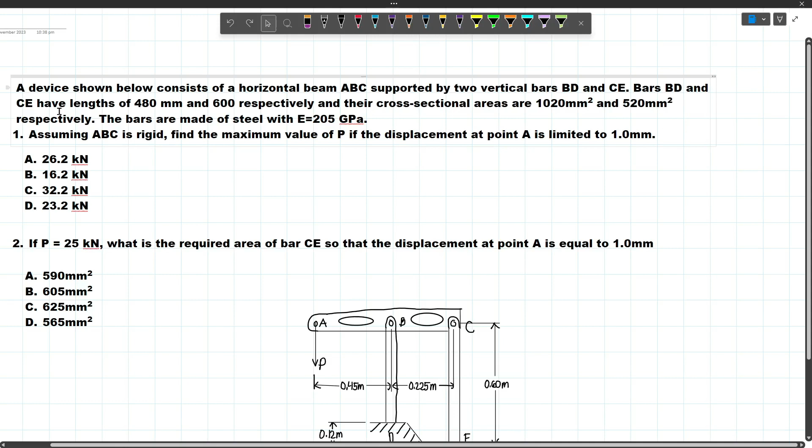A device shown below consists of a horizontal beam ABC supported by two vertical bars BD and CE. Bars BD and CE have lengths of 480 mm and 600 mm respectively, and their cross-sectional areas are 1020 and 520.

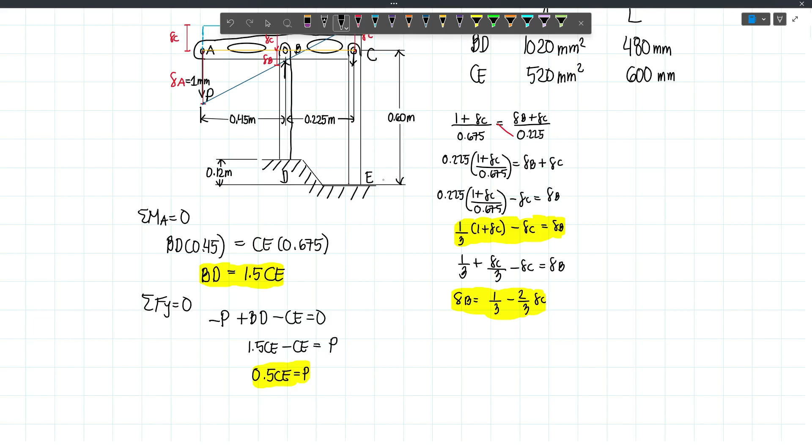Let's try to look at our question: assuming, find the maximum value of P if the displacement at point A is limited to 1 mm.

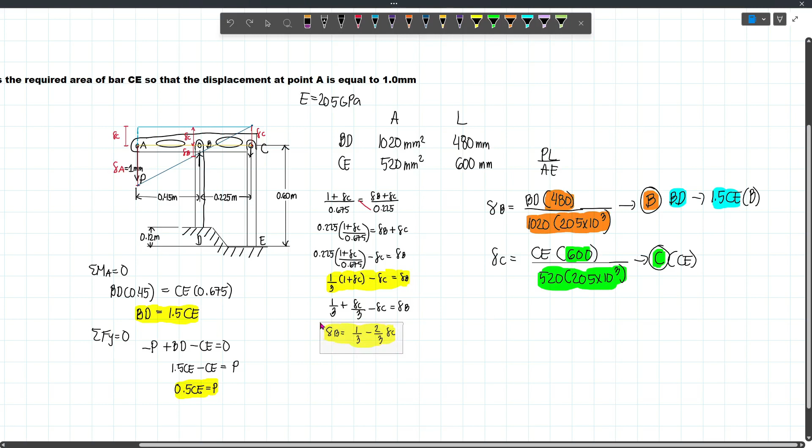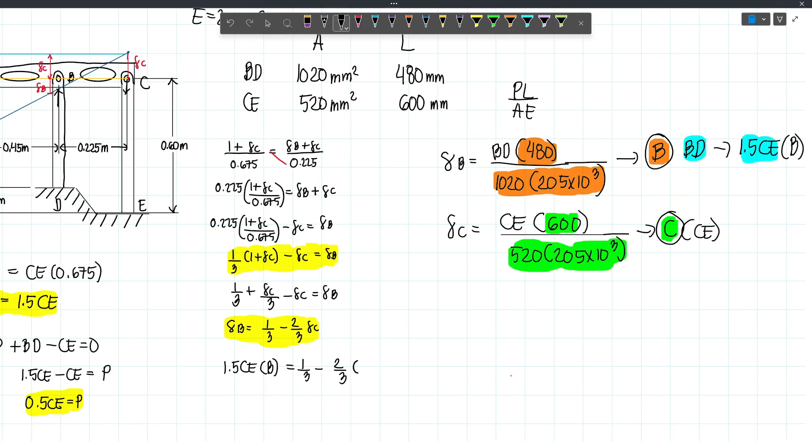And then equals 1/3 minus 2/3. The deflection at C is C times CE. So times C times CE. Now we can solve for CE since we can plug in known values. So CE times 1.5 times B. This has an advantage since we already stored that value, so we don't need to input the long expression again. And then equals 1/3 minus 2/3 times C times X.

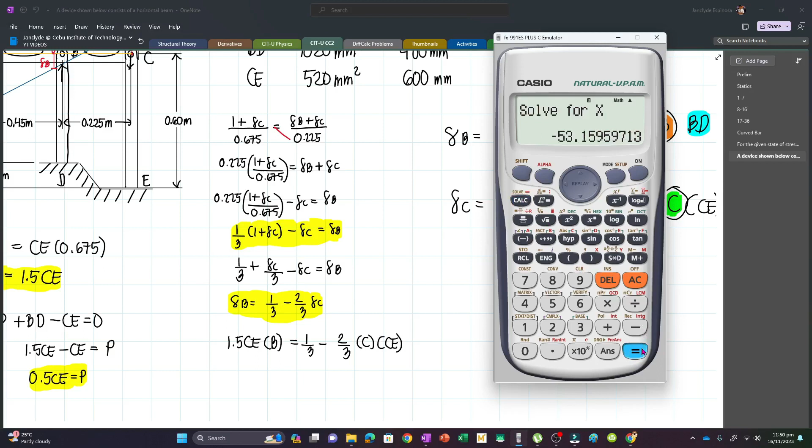Press shift solve. We can get the value of CE, which is 46324.13 Newtons. But the question is asking for the maximum value of P.

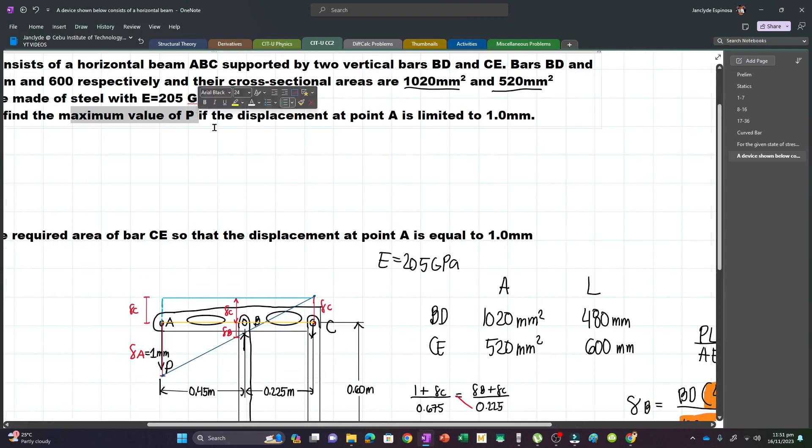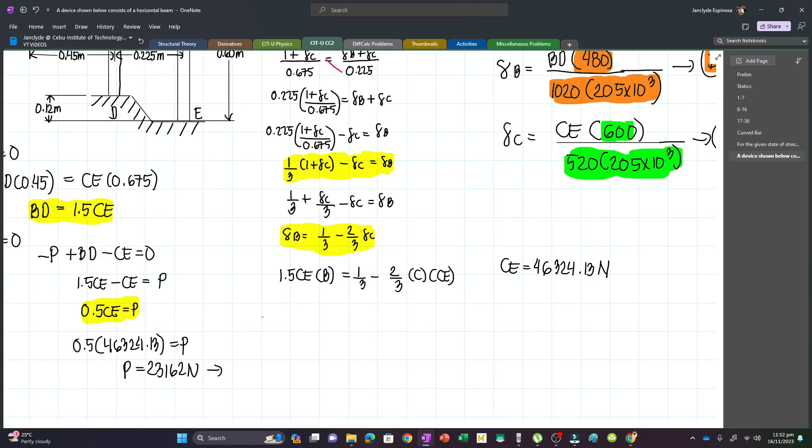So let's solve for P now. P in terms of CE is 0.5 CE. So we substitute 0.5, or basically 1/2, of this value. Let's just type it: 46324.13, that's equal to P. So our P is 23162 Newtons. And if we convert that into kN, divide by 1000, we get 23.16 kN.

So that's our answer, which is 23.2. I hope you agree.

Next, if P is equal to 25 kN, what is the required area of bar CE so that the displacement at point A is equal to 1 mm? We'll still use the same equations for this.

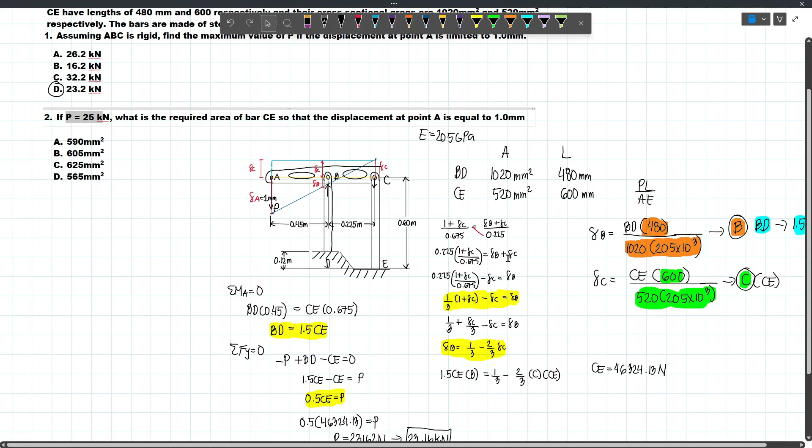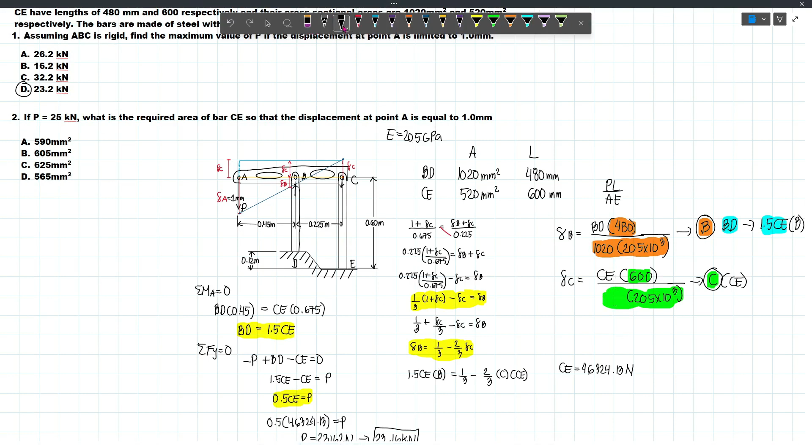However, what will change is the area of bar CE. This will now be unknown, so it goes away from the equation. Let's use ACE as our label for that. And then let's use these relations.

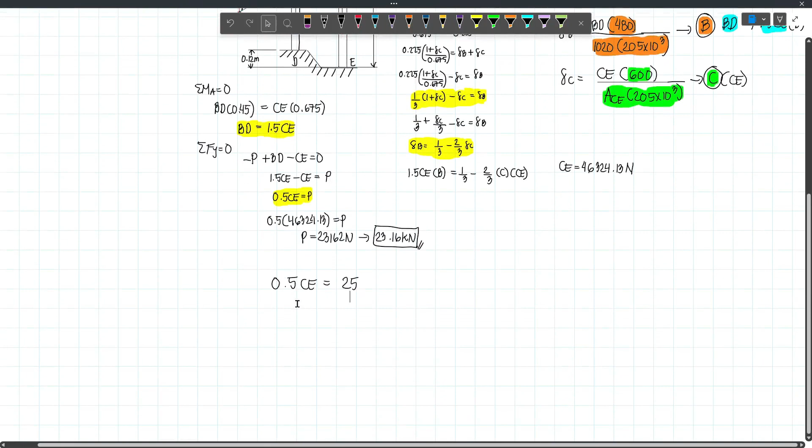Now if P equals 25 kN, let's use that. We know the relationship between CE and P: 0.5 CE equals 25 kN. Let's set that aside since when we substitute into the elongation equation, the units need to be consistent. So CE is simply 25 over 0.5, or times 2, which gives 50,000 Newtons.

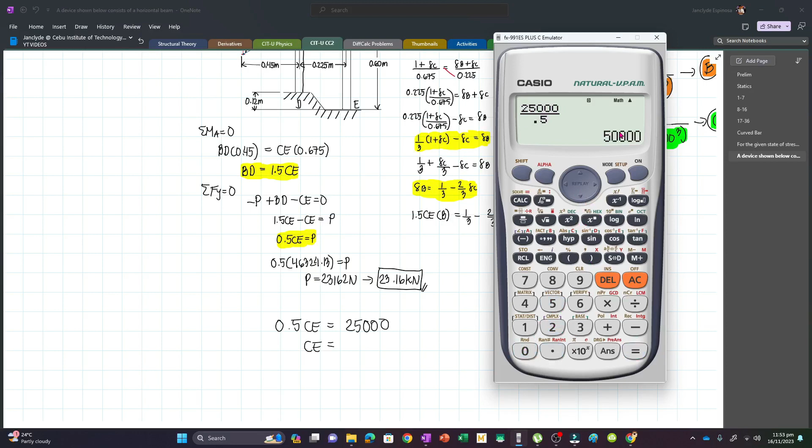And then we know that BD is equal to 1.5 CE. Let's use that relation: BD is equal to 1.5 times 50,000.

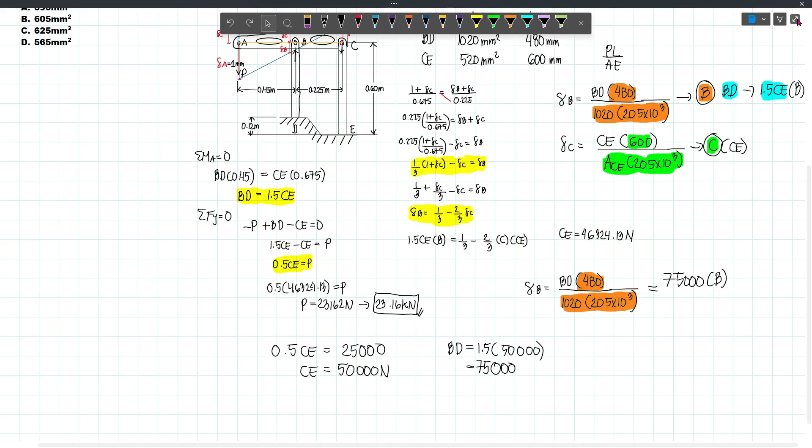That gives 120 over 697. Let's just get the decimal value, which is 0.172. So the elongation at B is equal to 0.172.

Now what we can do here, since we need the elongation of CE again: 50,000 times 600 over ACE times 205 times 10 to the 3. This constant value, let's store it in D. So the elongation at C reduces into this form.

Let's just say we store it in D, that's the green value. That becomes D over ACE. I hope you agree. Again, the green value is already stored. So D over ACE, let's input that value D into the calculator.

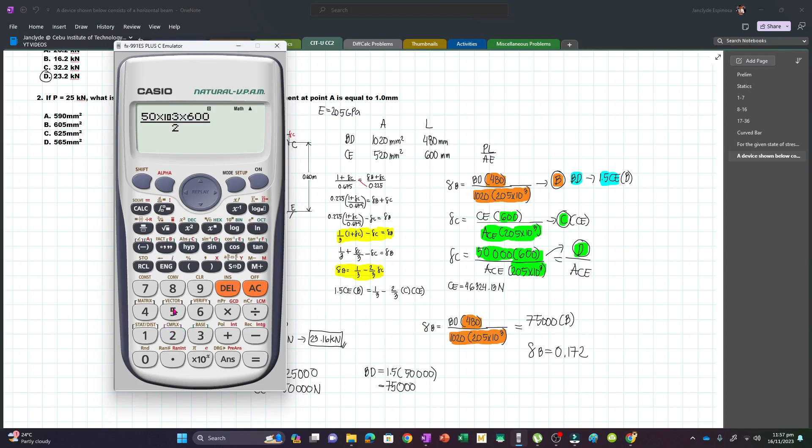So that's equal to 50,000 times 600 over 205 times 10 to the 3. And so we store that in D. That's it, and we'll plug all of this into our equation.

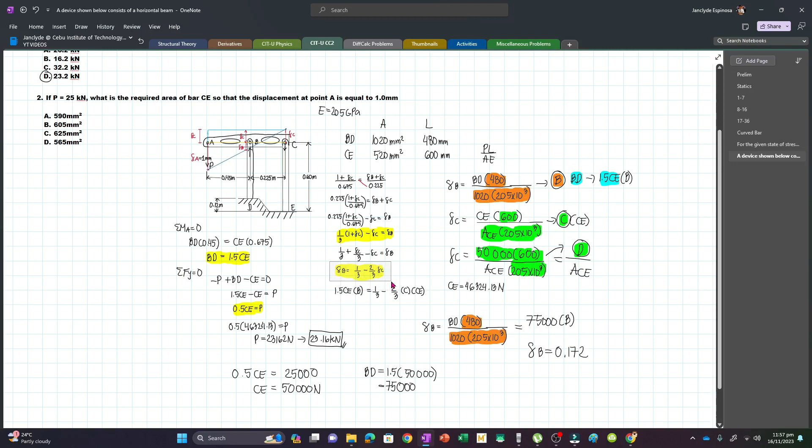Again, this comes from our deflection at B equation. Let's just copy that. Remember the deflection at B is 0.172. So 0.172 is equal to 1/3 minus 2/3 times the elongation at C.

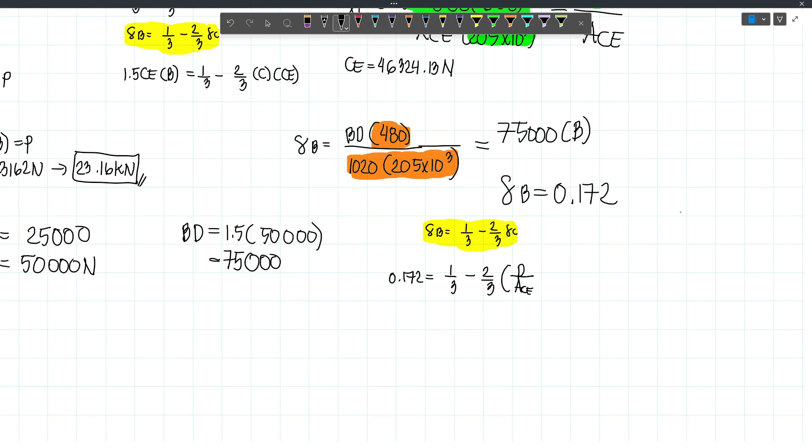Now the elongation at C is D over ACE. So that becomes D over ACE. D is already stored in the calculator, and our unknown is ACE. So let's type 0.172 equals 1/3 minus 2/3 times D over the unknown ACE.

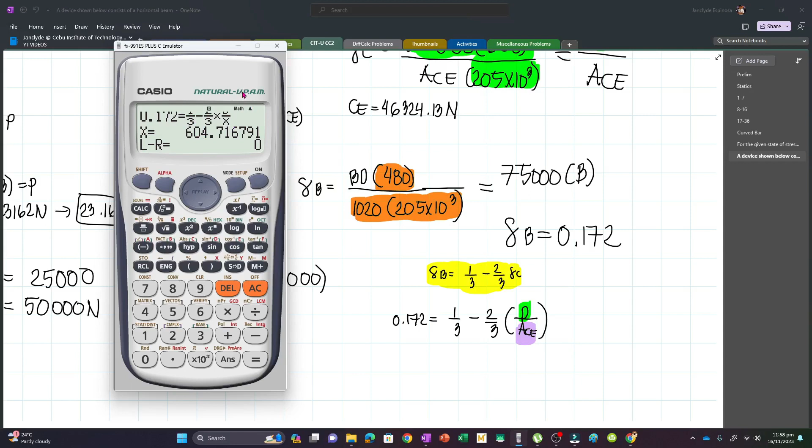Shift solve, and the answer is 604.71. Now since the question asks for the required area of the bar, we need to round up, because if we round down it won't be safe. We always round up when the question asks for area. So our area ACE is equal to 604.71, rounding up gives us 605 mm².

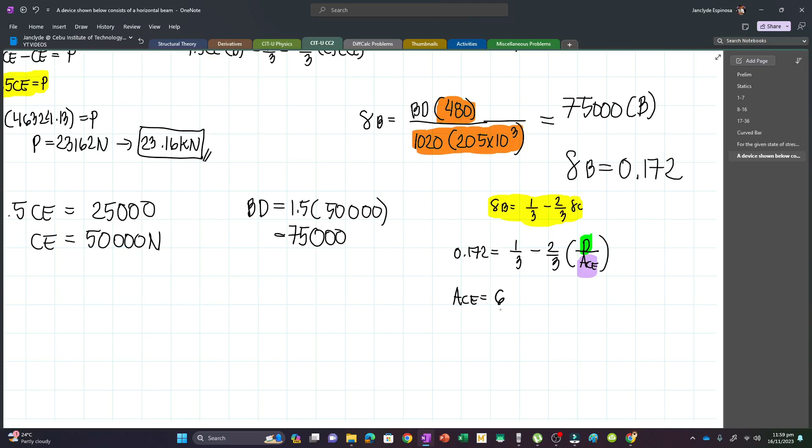So that's the answer, which is letter B.